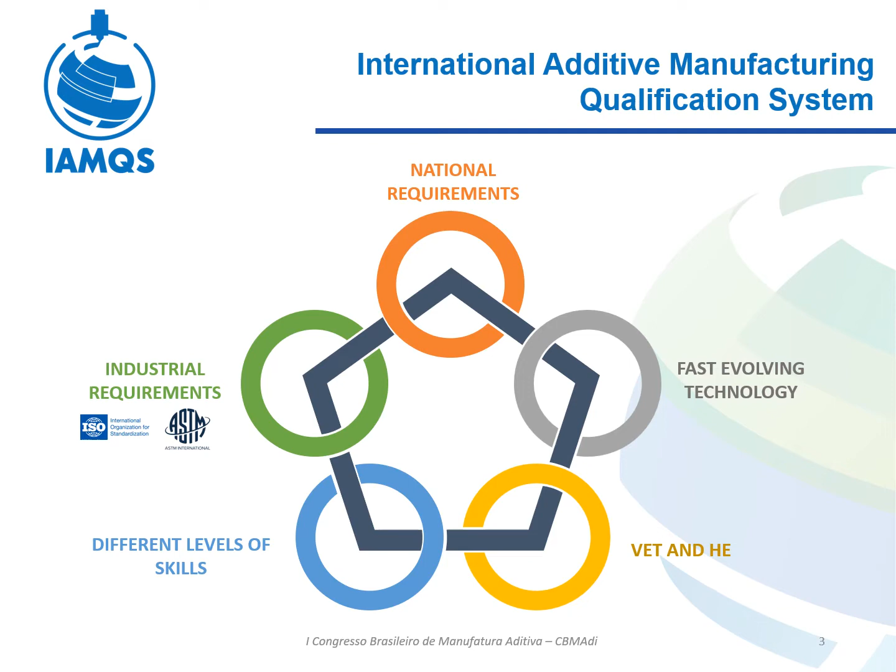And finally, but also very much relevant, it needs to be aligned with industrial requirements. We need to have qualifications and a qualification system that answers the needs and the requirements from industry. As part of that, we also make sure that the qualifications that are developed have a very close connection with the standards that are being developed at ISO and ASTM level.

Looking at what has been happening already, the IAMQS was the starting point to create a network of training centers across the world. It started in Europe, but is already moving outside of Europe. And we currently have identified and developed the following international metal AM professional profiles: the AM process engineer, an AM supervisor, an AM designer, an AM operator, and close to be released, based on what industry asked for, an AM inspector.

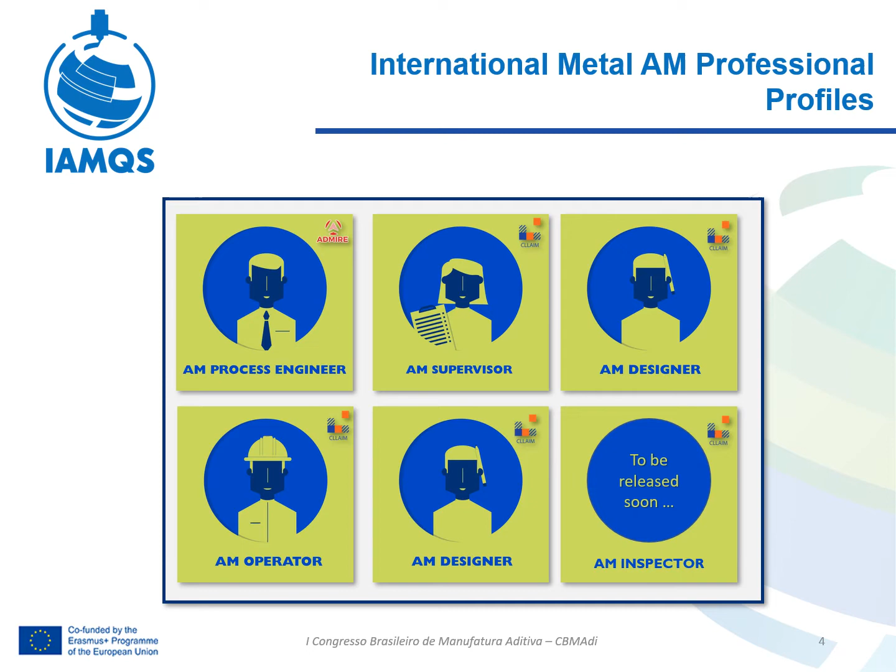Just to give you a bit more information of how this has been developed and organized, keeping in mind, once again, these were developed in projects funded by the European Commission, like ADMIRE and CLLAIM. One of the first questions we asked industry was, do we need an operator for all the processes, or will an operator be dedicated to a specific metal AM process? And the feedback we got was that yes, the operator will have a specific process.

It doesn't mean that an operator cannot operate more than one process, but it means that you will need to get training on the individual process you're going to work on, being a DED arc operator, a DED laser beam operator, or a powder bed fusion laser beam operator.

Moving on to the designer, we understood also from industry feedback that the approach needed to be slightly different. There's no specific requirement for an AM designer for a specific process, but more for groups of processes. So it's expected that an AM designer for powder bed fusion processes can deal with design rules for powder bed fusion with laser beam, as well as design rules for powder bed fusion with electron beam. The same thing we see for DED processes.

At the process engineer level, we understood that there's also a requirement in terms of specialization for two main reasons. First of all, industry. If you look at industry, it's not that common to find companies that operate more than one metal AM process. So they will have engineers specialized in that specific process, and to make sure that people go in for training and qualification focused on the role they're going to have in their company, it was decided to create for the AM process engineer a specialization based on each individual process.

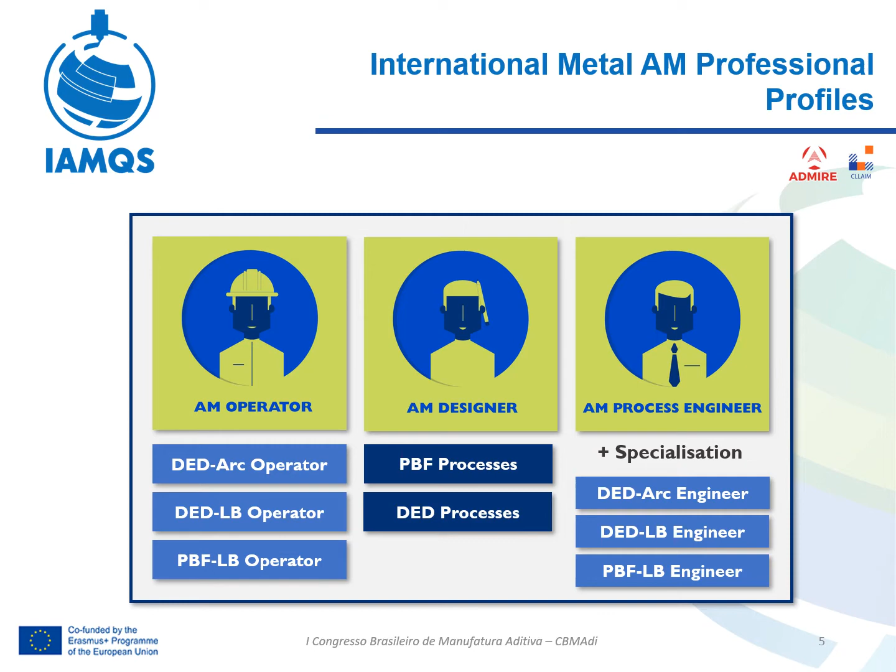Looking at what we are currently doing, we are in the process of approving AM training centers to create an international AM training center network. So just to clarify, EWF itself, we do not deliver the training. We authorize and accredit training centers, using qualifications developed by us with industry, to allow them to use those qualifications in a harmonized way to ensure that they can award diplomas that are recognized at the international level.

So if you are interested in becoming one of those training centers, being a professional training center, a university, a company, a machine supplier, we have, let's say, 4 basic steps. So first of all, the application. They need to apply to become an authorized training body and become part of the EWF network.

After that application happens, the training body will go through an authorization process based on the defined set of conditions and rules. So we have auditors to do this type of assessment, which will be done at point 3, which is assessment conditions. There will be a document review looking at the scope evaluation, which means pretty much which qualification you want to deliver, the conformity with the AM syllabus, the quality of the facilities, of the trainers, of the training materials, the quality manuals for the organization regarding training. Health and safety aspects will also be assessed.

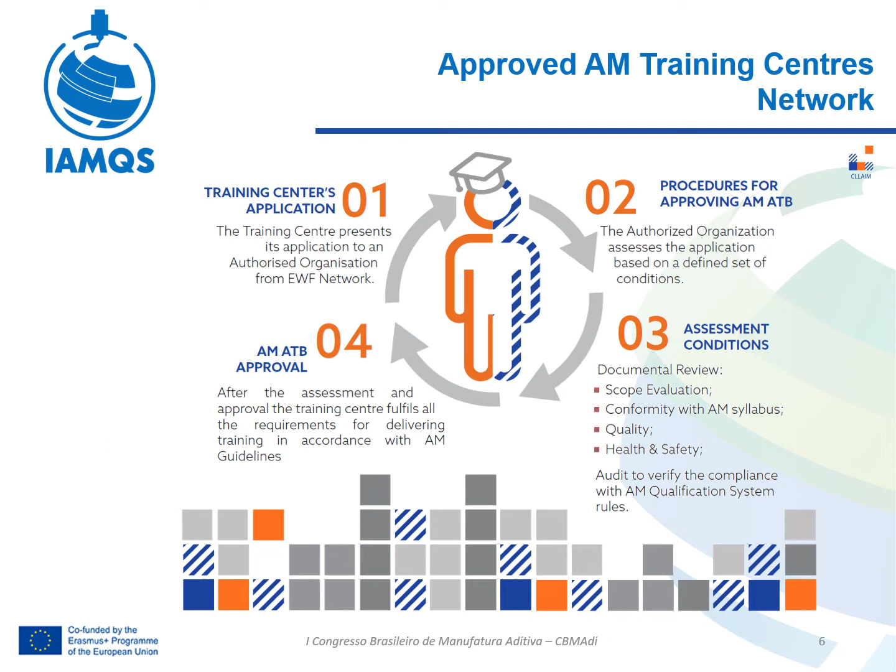And at the end of it, pretty much we can say that the audit will verify compliance with the AM qualification system rules. And final step, after the assessment is done and the training centers fulfill all the requirements, the training centers can start delivering the courses in a harmonized way based on international diplomas.

Like I said initially, this doesn't focus only on professional training, it goes from professional training to university training. And we actually also created a European master degree curriculum to be given by a network of universities. So this means that the university can specialize in their specific process and know-how, give the students some specific modules, but then the student has the possibility to go to other universities and complement his education in additive manufacturing. Like I mentioned, this started at the European level, but we are now rolling out this system for professional training and university training to outside of Europe.

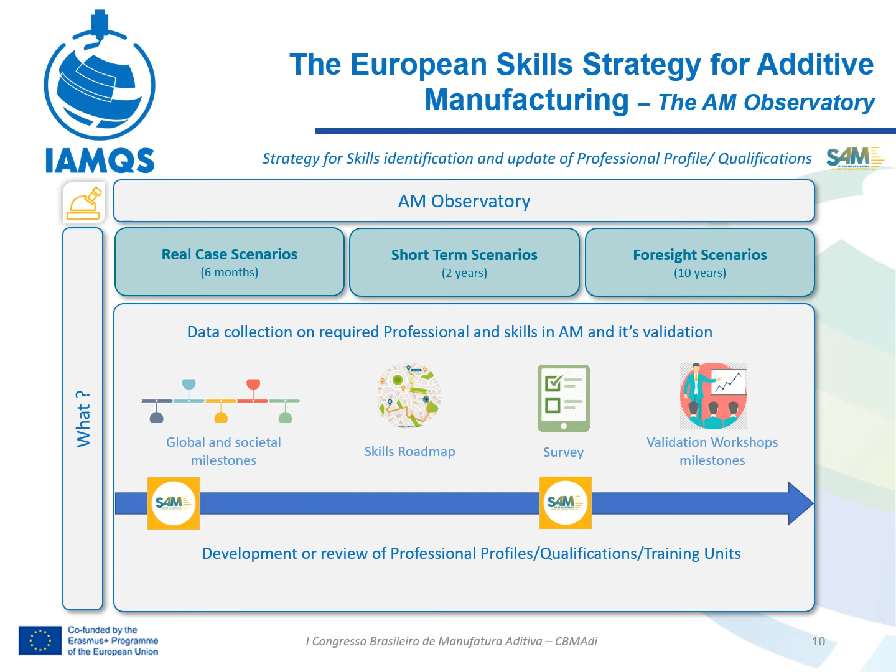So just to give you a bit of information on how we work, we have what we call an observatory, which is pretty much an interactive platform, but we're also a group of people in working groups, councils and boards that get data from awareness, AM research, AM projects, AM database information. We also have a network of organizations that work with us that keep feeding information about what is needed, and we will roll out sets of data tracking schemes to understand what students, job seekers, trainers and trainees are looking for related to additive manufacturing. That they got a job, which training they want to do after, those types of information.

We will have a methodology that we're already using to measure skills needs in AM. We'll support implementation of the qualification system, and we'll also develop and feed a set of data to update AM profiles as industry evolves in additive manufacturing.

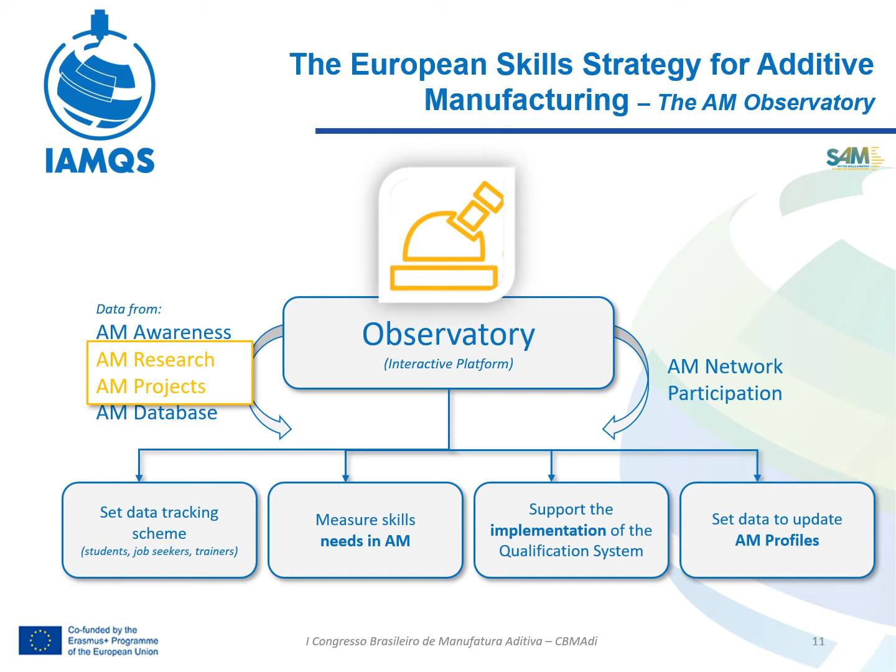Picking up on this and jumping to the next topic, I'm going to move from the qualification and training activities that Europe has been pushing very hard for the last 3 to 4 years, and now more at the international level also. I'm going to give you a bit of information about AM research projects funded by the European Commission, and these are just some examples for you to get an idea of what the European Commission is funding and what research organizations are developing in additive manufacturing. So I'm going to talk about 3 projects. There are many more, but this gives you a very good overview. I'm going to talk about the AMABLE project, the LightMe, and the MultiFUN project.

Focusing first on the AMABLE project, which we can't really say is a research project. It's more the creation of a platform to support SMEs that want to get into additive manufacturing. SMEs that are not aware of additive manufacturing, SMEs that want to get into additive manufacturing need some support, but also SMEs that are already using additive manufacturing and want to improve what they are doing with it. So the idea here is to provide support for small and medium enterprises and mid-caps for their individual uptake of additive manufacturing through an ecosystem that provides a wide offering of services.

So the idea here is to have a platform with service providers, which are research organizations, external organizations, training organizations, probably in the near future certification organizations, that can support SMEs regardless of their maturity level in additive manufacturing in improving what they do. So we have a range of services, and they're very much attached to where you are in terms of additive manufacturing.

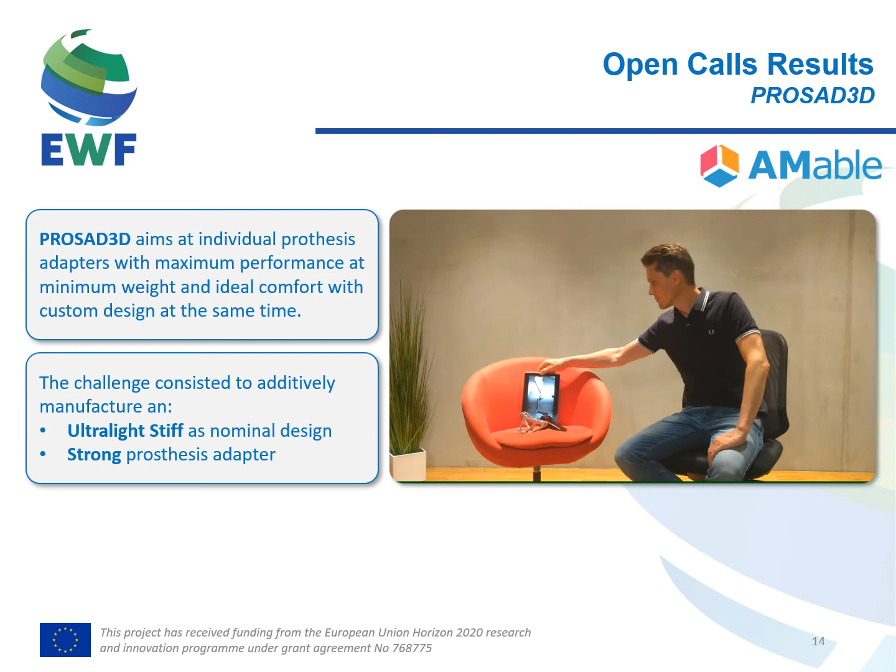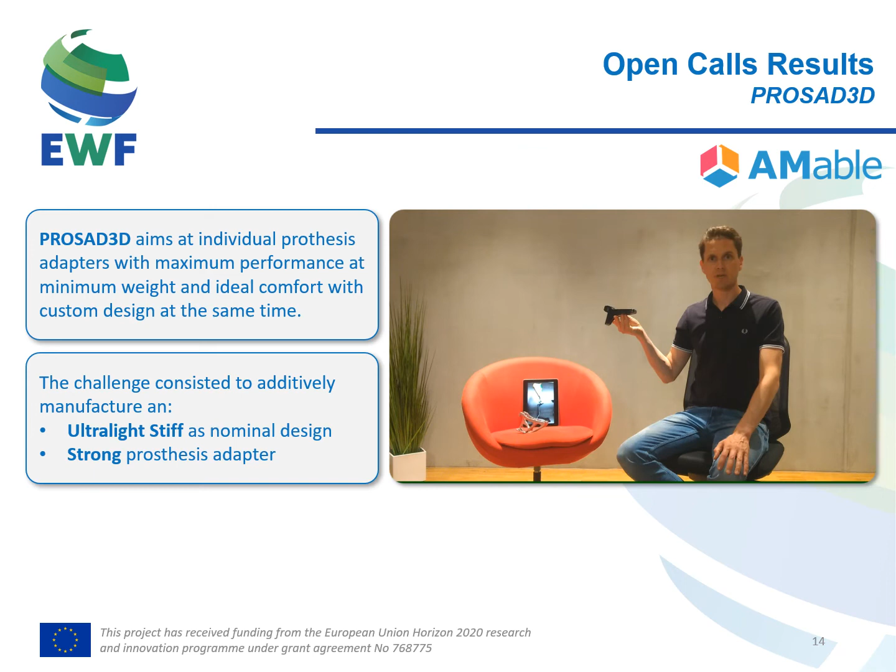Hi, my name is Benjamin. I'm part of the team at Space Structures, a Berlin-based space company. Today I would like to show you some cool stuff from the non-space domain. Leg-disabled people use prostheses like the one you can see here. Between the knee hinge and the carbon foot sits an adapter that is quite heavy. This adapter weighs around 400 grams and is a real burden in competitive sports, especially when you have to carry two of them. That is why we partnered with the Paralympic Sports Club of Berlin to release the lightweighting potential. This adapter weighs 162 grams, less than half the weight of the original, but with the same performance in strength and stiffness. We employed mathematical algorithms to remove material where it's not needed and add it where necessary. This is called topology optimization. The complex geometry was brought to life by additive manufacturing, in which aluminium powder is melted layer by layer by a laser spot. This part is now sent out for field testing with an athlete. Thanks AMABLE for the support, and thank you for tuning in.

So an interesting example of a company that was supported by AMABLE to reach a specific part. I have another one. This was a project called BeActive, to provide medical assistive devices that support people in rehabilitation from broken bones and other injuries. The key challenges were antimicrobial properties of materials and lightweight design, and this was another SME that was supported by AMABLE with a range of services to address these challenges.

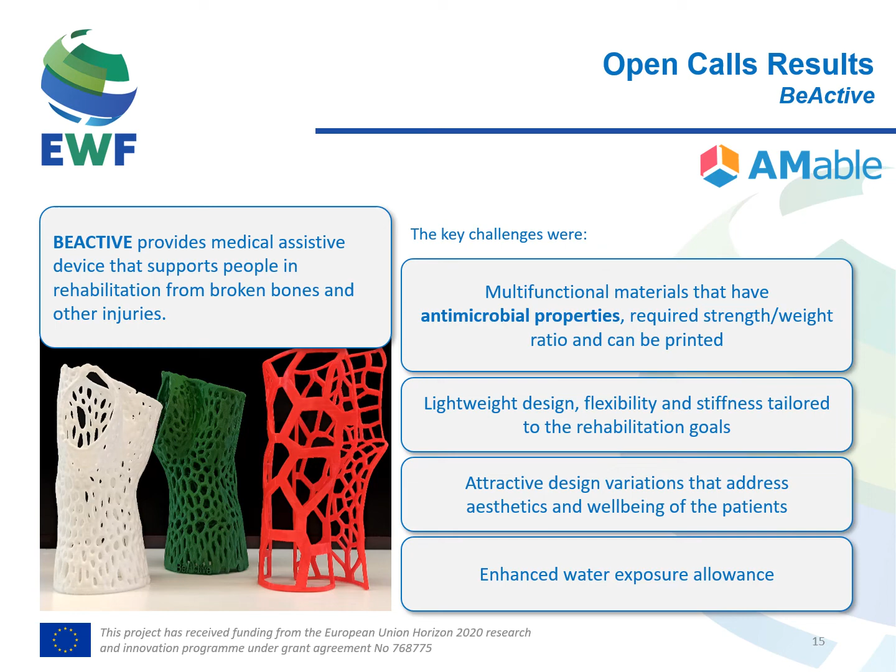Another project I'm going to talk about is something we're seeing more and more at the European level, which is the creation of services and pilot lines associated with those services. The concept of a pilot line is to have facilities with different processes and capabilities where companies can come in and try out or develop a specific product, try out a specific technology, or look to upscale their production.

So the idea is to attach a range of services. In this project, LightMe, we actually established two additive manufacturing pilot lines. And the idea is to have not just the pilot lines available for companies, but also an ecosystem with a range of services and support activities, from monitoring, testing, modeling, market uptake, innovation management, all coming together to support companies that want to use these pilot lines.

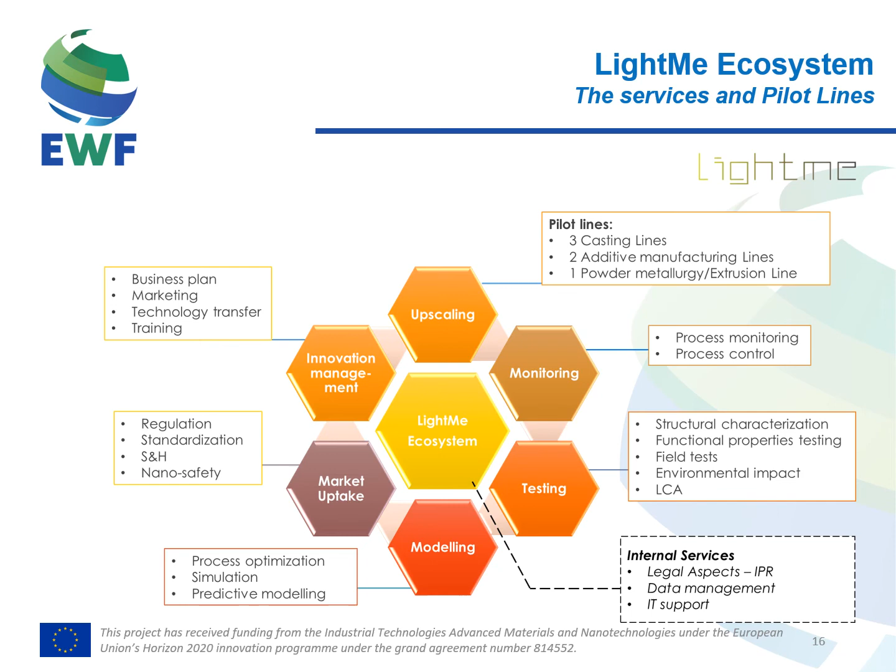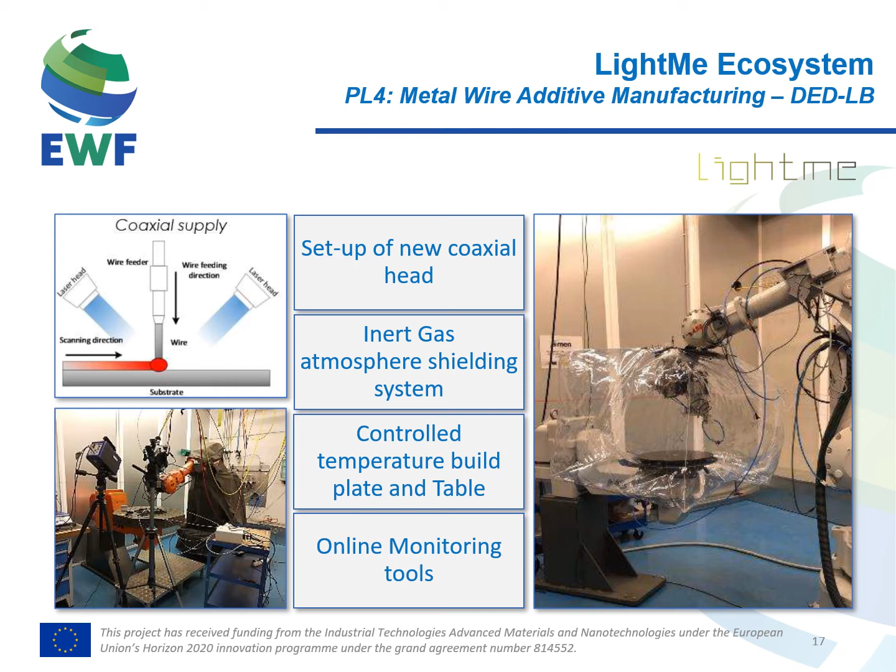Some examples here. So this is a pilot line with metal wire additive manufacturing that was established to make sure that companies can also use this type of technology, in this case the laser beam, to test specific product ideas or to see if the product can be made in a different way. This is a type of concept.

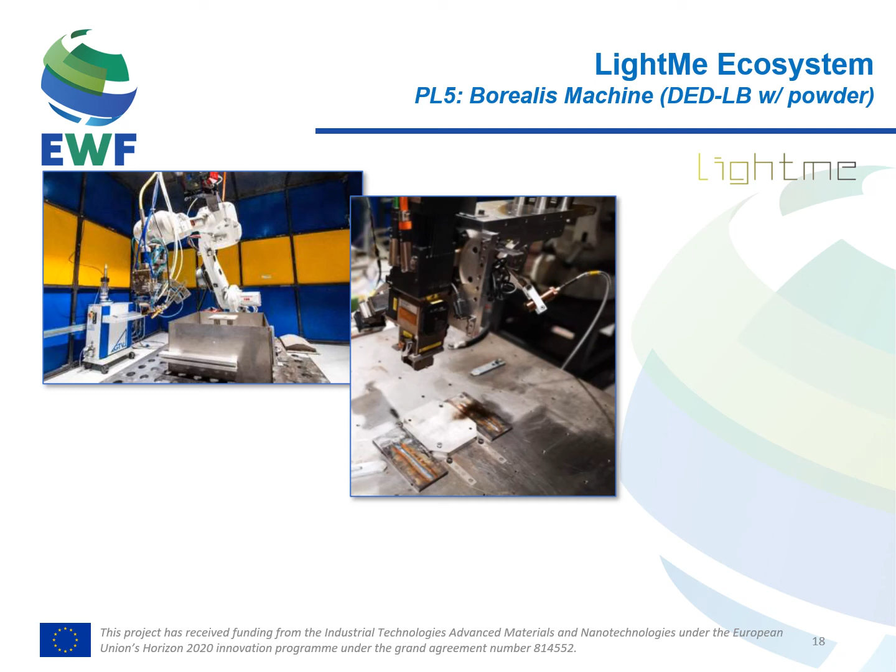Another one that is also related with additive manufacturing is another pilot line based on a Borealis machine that was developed in a different project. In this case, with the laser beam with powder. So the idea is that companies can come in and use these machines if they want to test something.

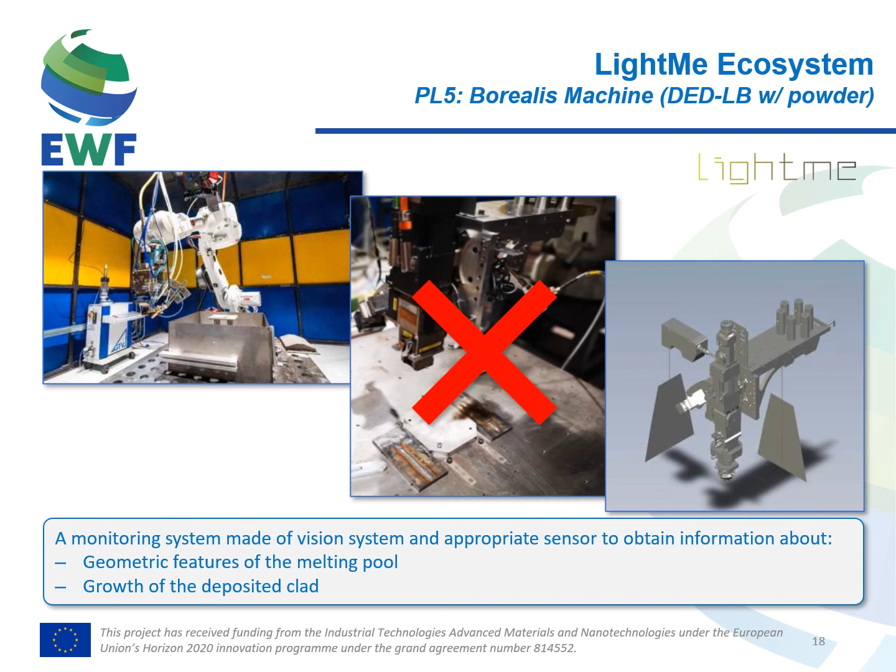In this case, we are actually updating the machine to make sure that it can also keep track of geometric features of the melting pool and growth of the deposited clad, to make sure we have a bit more of a tracking and control system, also to facilitate the usage of these pilot lines by companies.

Finally, the last project I'm going to talk about is probably the most research focused project that I'm going to talk about today. So the idea of this project is to look at metal additive manufacturing, powder bed fusion, not really only powder bed fusion, but looking at additive manufacturing, and try to tackle two, let's say, gaps.

First of all, powder bed fusion is normally not capable of going beyond single materials. It's a bed full of powder, so what we normally see is one single type of powder in that bed. But also the current range of standard alloys is rather small. So the idea of Multi-FUN is to overcome these shortcomings by integration of multi-functionalities due to, first of all, novel active materials, but also new structural material using wire arc additive manufacturing, or most known as WAAM.

Another objective to overcome these shortcomings is to start using multi-material design in geometrically complex 3D parts. So to go beyond thinking of designing parts for one single material, more to have parts that can be improved in terms of functionality or in terms of characteristics by being designed considering multi-materials.

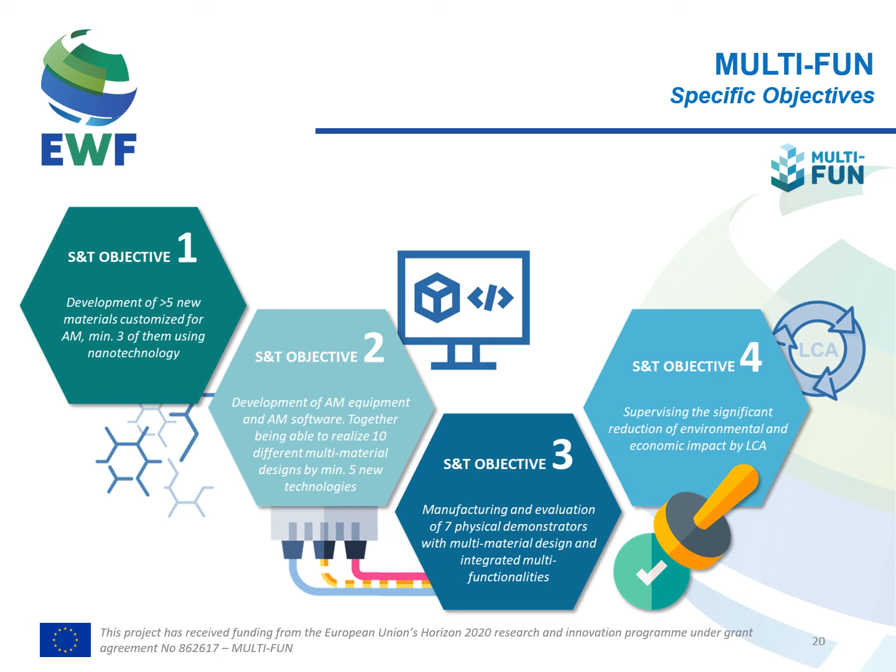Like I mentioned, we'll try, first of all, to achieve this objective better. We'll try to maximize the benefits by trying to combine different materials, but also combined with the right AM technology for the deposition. So we are not limited to a specific process. We are trying to see, for a specific material or for a specific part or for a specific combination of materials, which is the best suitable AM technology for that deposition.

Just to give you some examples of features that we can start looking at, or we're already looking at, by inclusion of nanomaterials and multi-materials. So first of all, we are looking at using these nanomaterials included into the material deposited as heat sink materials with the highest thermal conductivity.

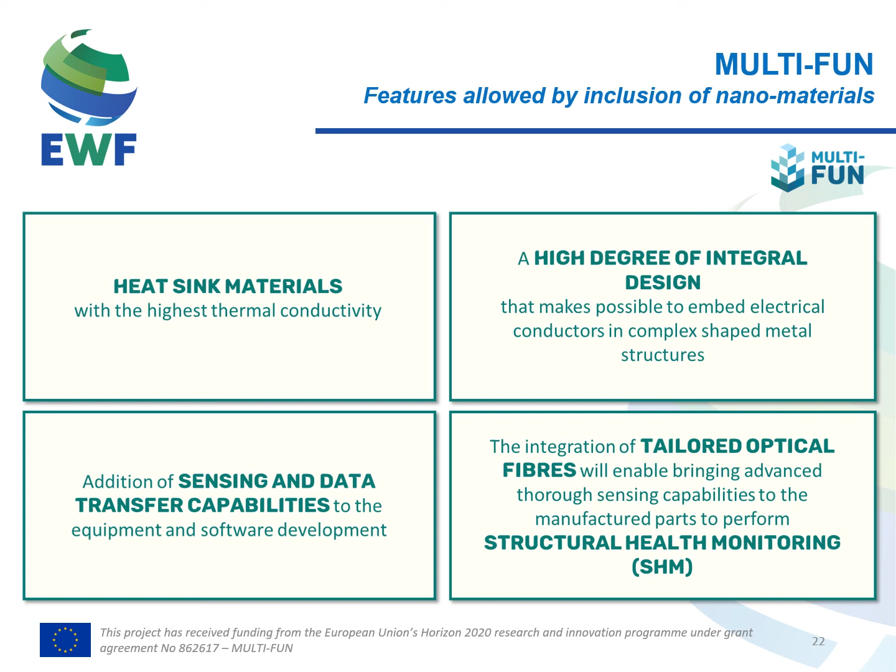Also looking at having a high degree of integral design to make it possible to embed electrical conductors in complex shaped metal structures, for instance. Addition of sensing and data transfer capabilities to the equipment and software development. And also the integration of tailored optical fibers will enable bringing advanced sensing capabilities to the manufactured parts to perform structural health monitoring. So we are trying to see how much of this we can do. It's quite challenging, but this is the overall objective.

So just as a final conclusion, this was just a range of projects that have been running at the European level at the moment, funded by the European Commission, and just to give you an idea of how diverse they are, from qualification development, from master degree development, from training development, to providing services to SMEs and to industry,

to creating pilot lines where industries can come and test their ideas and upskill their capability, and finally, also to develop new materials, improve AM processes, and actually push additive manufacturing forward. I think that's the general objective of all these projects.